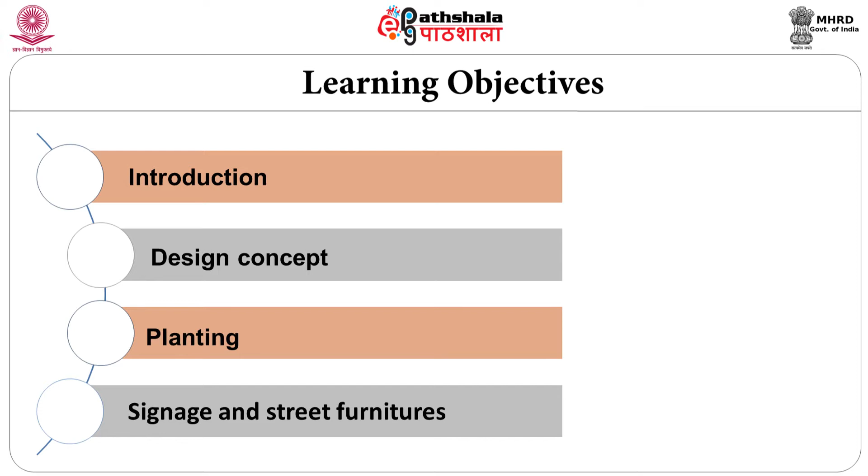Welcome to ePathshala. We are now going to talk about urban designing of Ripon building, which was a 100 years old Indo-Saracenic architectural style building, which houses the Corporation of Chennai.

They have called for a competition of restoration of the historical landscaping and restoration of building architecture, incorporating what was there 100 years back when the old building was designed and executed with the landscape inputs. It was a very challenging project for us, as giving back what was there 100 years back was the assignment given to us. We designed everything incorporating the existing design features which are there as a historical landscape or Indo-Saracenic architecture, neo-architectural style, neo-classical style.

So we took up in landscaping the Mughal architecture as a concept, as a style to be adopted, and then we adopted neo-classical style of architecture for all the buildings which are going to happen around the Ripon building.

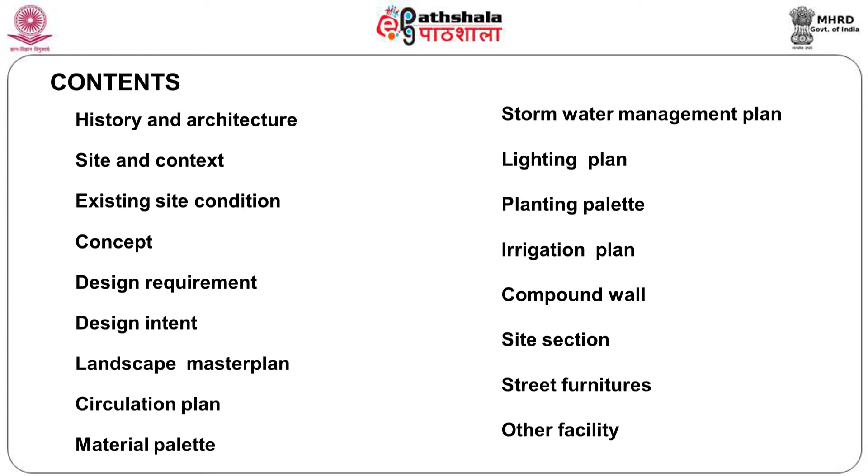Then cross-section of the building, street furniture - you need to have a drinking water facility, other facilities for people to sit, some benches and other facilities which are required for the building need to be taken care of. Ripon building is the seat of Chennai Corporation.

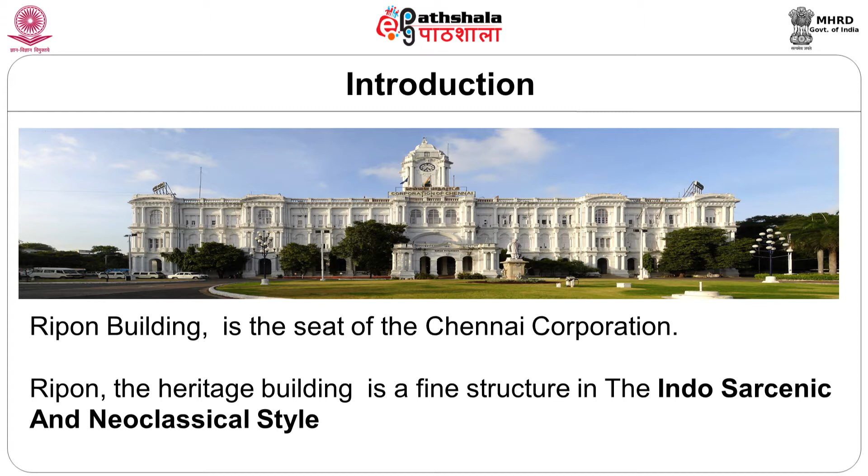Ripon, a heritage building, is a fine structure in Indo-Saracenic and neo-classical style. This building was commissioned in the year 1913 and derived its name from the father of local self-government and Governor General of India during British time, Lord Ripon.

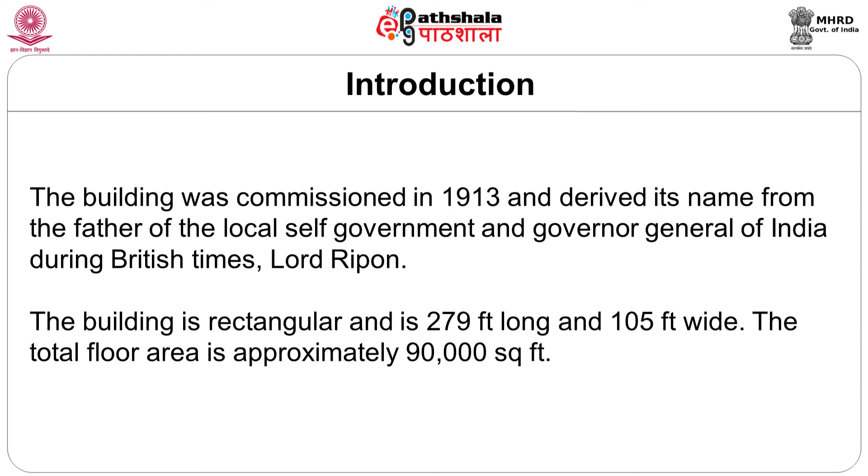The building is basically a rectangular building in those days, roughly 279 feet long and 105 feet wide. The total floor area is approximately 90,000 square feet, roughly around 2 acres of built up area.

In 2012, they have taken up major renovation initiated under the Jawaharlal Nehru National Urban Renewal Mission to preserve the building's original grandeur.

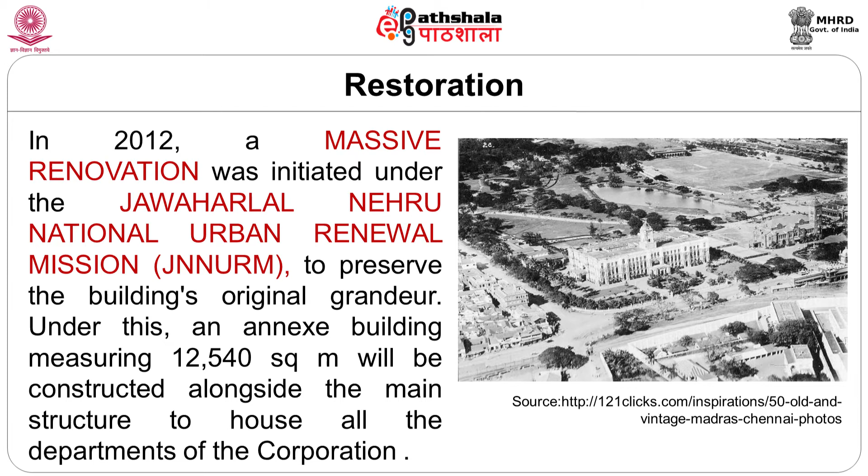And under this scheme, they also built another annexure building of 12,540 square meters that will take care of all the other building activity which are all there right now, which need to be demolished, as they do not blend with the architecture of the present situation. That was the basic intent of this particular assignment.

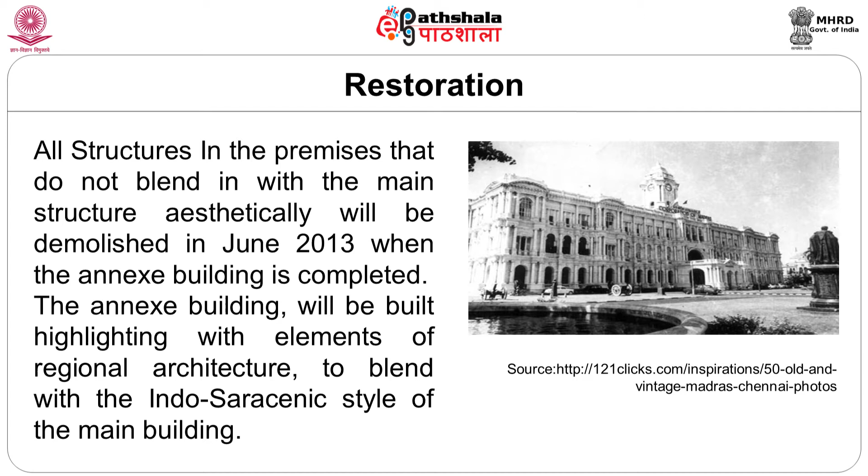So Ripon building is a fine structure in the Indo-Saracenic and Neoclassical style architecture. It's a smooth blend of Ionic, Gothic and Corinthian styles.

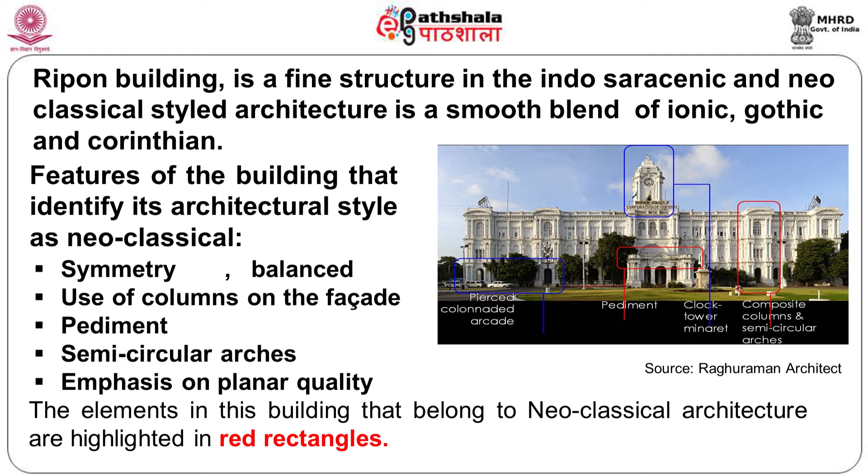The features of the building that identify its architectural style as Neoclassical are basically symmetry, balance, use of columns on the facade, pediments, semicircular arches, and emphasis on planar quality. The elements belonging to neoclassical architecture are highlighted in the rectangles shown, which are all neoclassical styles.

Features in the building that identify its architectural style as Indo-Saracenic. We are talking about two things: neoclassical and Indo-Saracenic. The Indo-Saracenic elements come under the clock tower, marked in blue, internal courtyards, and pierced colonnaded arcades. These all become part of the Indo-Saracenic style. It is a mixture of both styles, but it's a very elegant building.

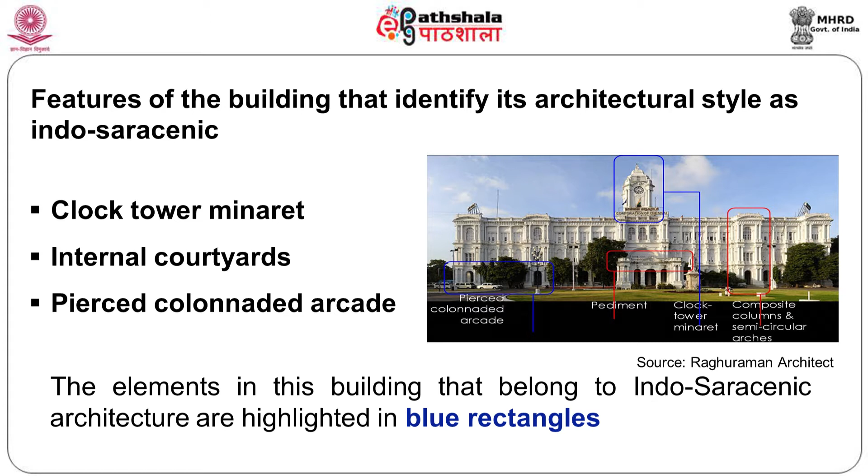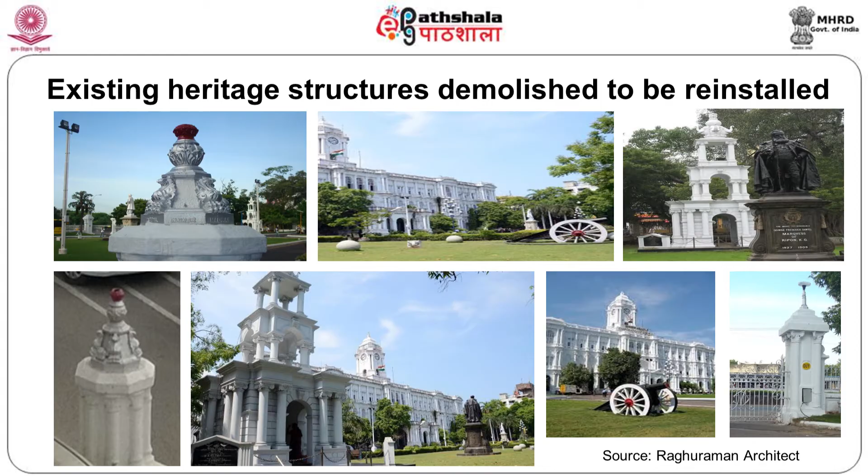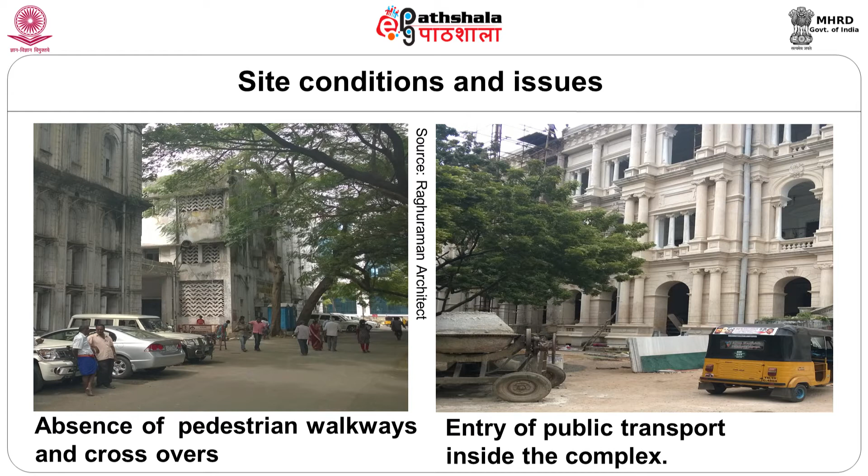Now cars are parked in a haphazard way everywhere, wherever space is available. Again, the trees have grown in a different shape as the sunlight angle changes because of the existing buildings. There are 4 statues of eminent personalities housed in this particular facade of the building, which need to be organized.

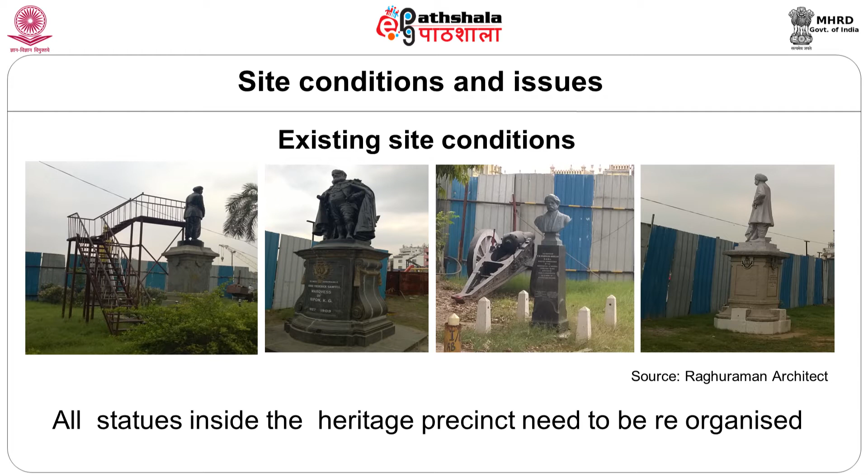It's a basic site plan. Now we are showing you the site plan view, but first we will see the site boundary. This is the boundary, roughly around 12 acres of area. The heart of the city corporation of Chennai is holding around 12 acres. It's itself a very big area, but we have to use it very effectively, which is more important.

We talked about the boundary line, then we have the roads - major roads like Poonamallee High Road, and internal access roads are available. We have a railway station, Central Chennai Railway Station next to that, and a Reservation Complex next to that. So all these very heritage roads - this is more of a heritage road. So how are we going to approach this?

Then we are talking about internal roads - these yellow colors are internal roads. Then we are talking about heritage buildings - the Ripon building and Victoria Hall, both are heritage buildings. Then these red color ones are all proposed buildings.

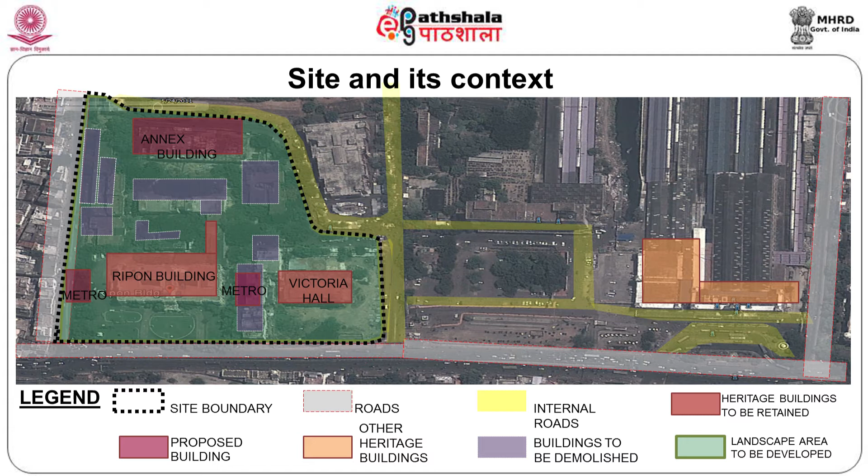Then this whole entire area needs to be landscaped. Then we look at the existing tree cover and greenery survey drawing.

Some design concept - we will talk about the design concept. We have 2-3 activities which are going to take place here. We are talking about building some structures in terms of connecting corridors, car parking, and then canteen or restaurants or eating places.

Then your landscaping is going to be in Mughal architectural style because it's squares and rectangles, which will give guidance from the building. You have to take the hint from the building - the building is more important than the landscaping. So landscaping has to be subdued, but Mughal architectural style landscaping needs to be done here.

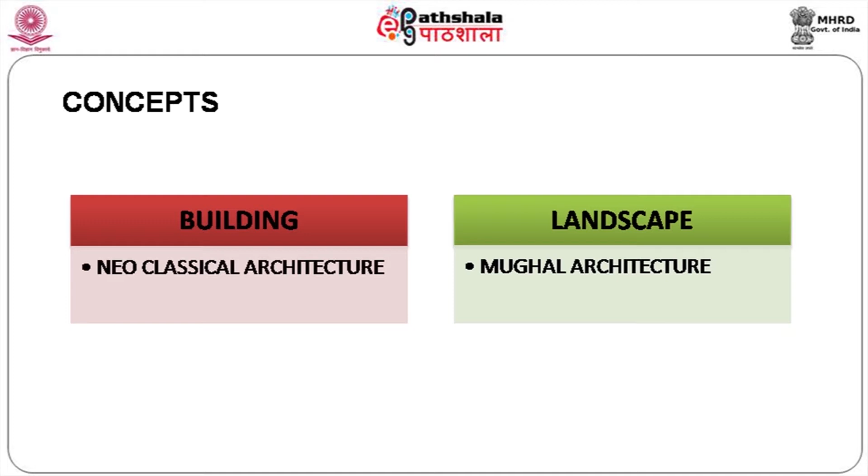What is the design requirement? The landscape design, circulation, multi-level and basement parking area is required. Then we are talking about stormwater drain network, rainwater harvesting is a must, and what kind of material we are using, planting plan. Then you need to have an irrigation network, electrical design, canteen, library and play courts. People also need to relax in that area.

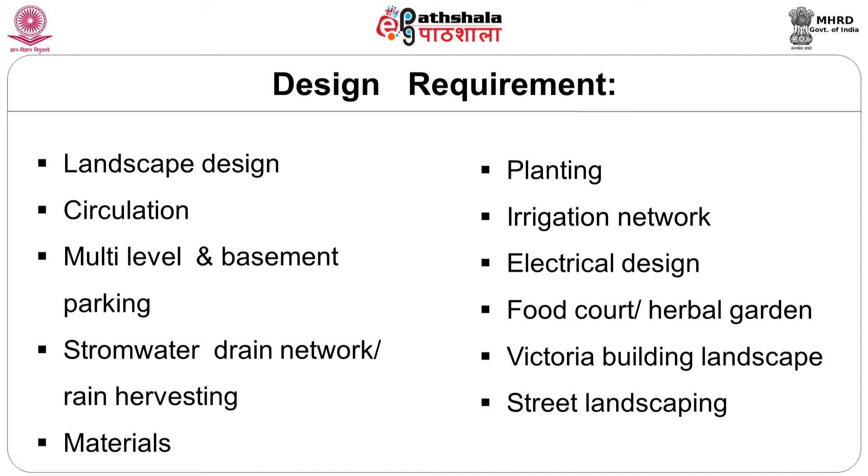Then you have an adjacent building, the Victoria building, where you need to do the landscaping. Then your street landscaping, which is more important. All these things will contribute to the overall design requirement.

Design intent - basically what are we going to do? Circulation: entry strategically located considering the metro and bus terminals, with separate entry for VIP, staff and visitors for security reasons. So staff and VIP entrance need to be segregated so that everybody cannot enter through every access available. Then only you will have overall control of people entering the building area.

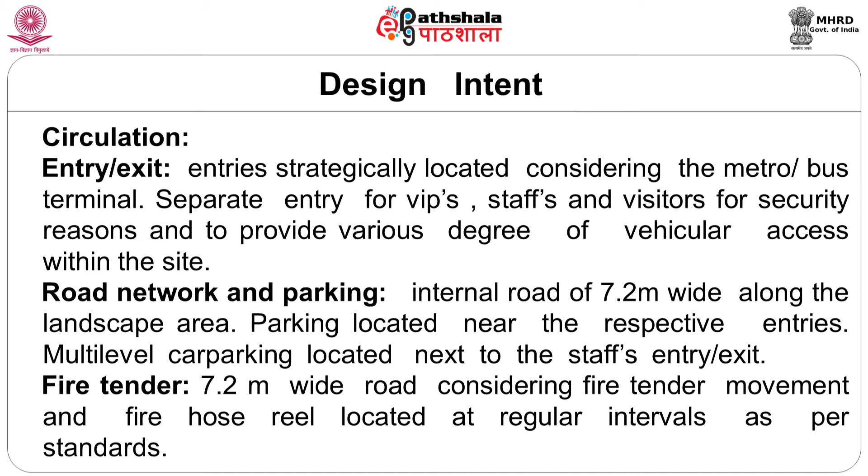The width of the road is also equally important - we need fire tenders to move around. Then we have to have a proper clockwise circulation so that people can enter from one direction and go in the other direction, or move around in a different way.

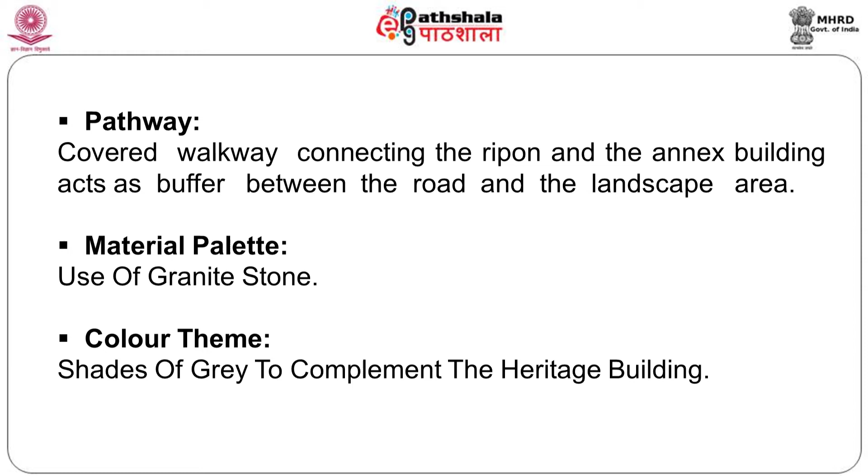Then you need to have connecting pathways which also have to be covered so that rain or shine it can work properly. For material, whatever natural material we plan to use - use of granite stones. Color theme: shades of grey to complement the heritage building. And rainwater harvesting - rainwater harvesting pits and ponds are proposed to harvest all the rainwater generated within the site.

Planting - how to go about tree planting and shrub planting.

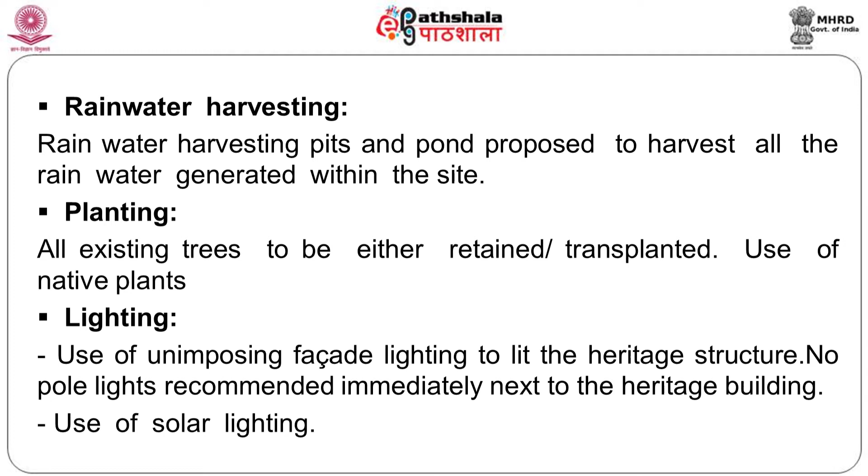All existing trees are to be either retained or transplanted, and we will use native plants. For lighting, we recommend unimposing facade lighting to light the heritage structure.

Old demolished structures need to be re-erected. Signages and street furniture also play an important role—you need benches for seating, a drinking water fountain, and signages to different places. You should not get lost in the campus; that is more important.

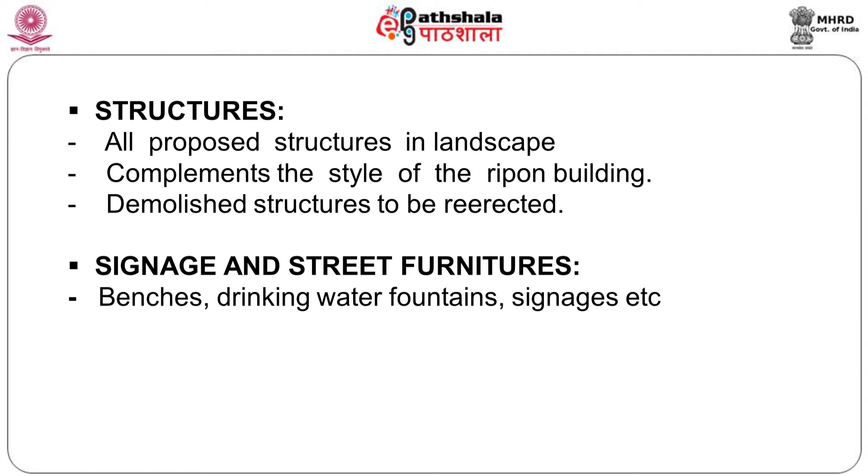The kolam and similar features are provided mainly as a showcase for the public to view that we are doing rain harvesting. Apart from rain harvesting holes provided all over the site, the excess water will collect in the kolam, and from there it can go into the normal rainwater drainages along the streets. That is more important. Plus the car parking and courtyards will all contribute to the restoration of this campus, to bring back its glory.

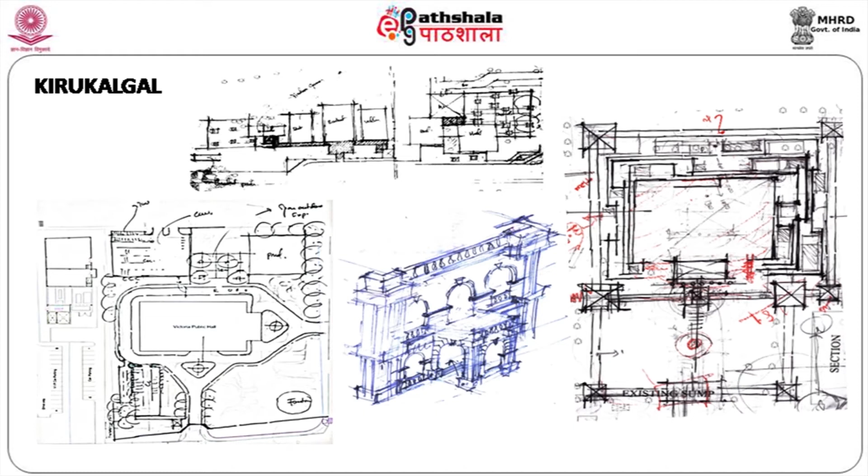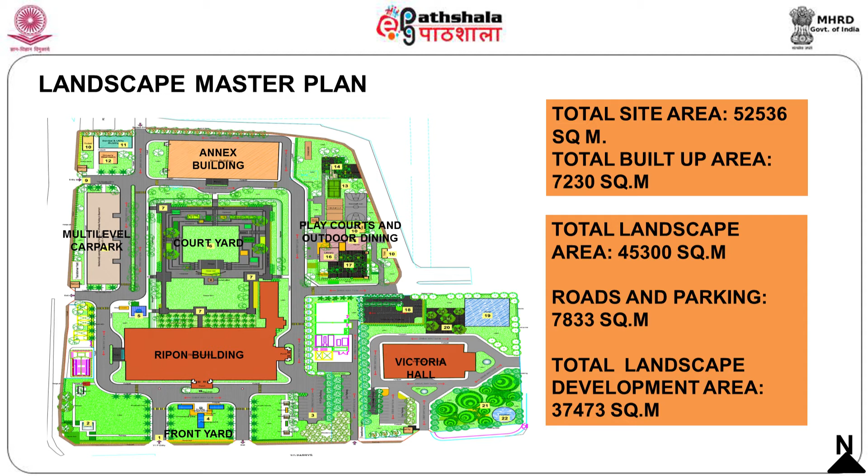So basically we have given requirements for VIP car parking, visitors car parking, visitors two-wheeler parking, staff parking, and basement two-wheeler parking—a lot of different types of parking have been provided. Apart from that, if you look at the length of the road, it's quite big, so there's enough parking to take care of all requirements.

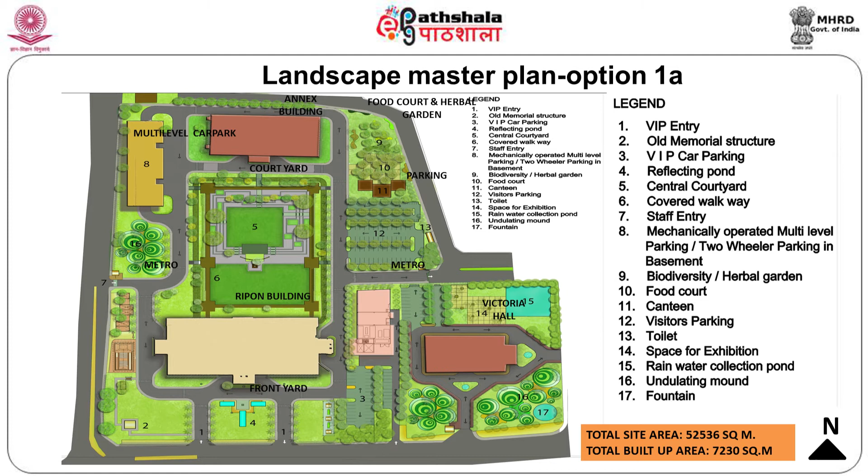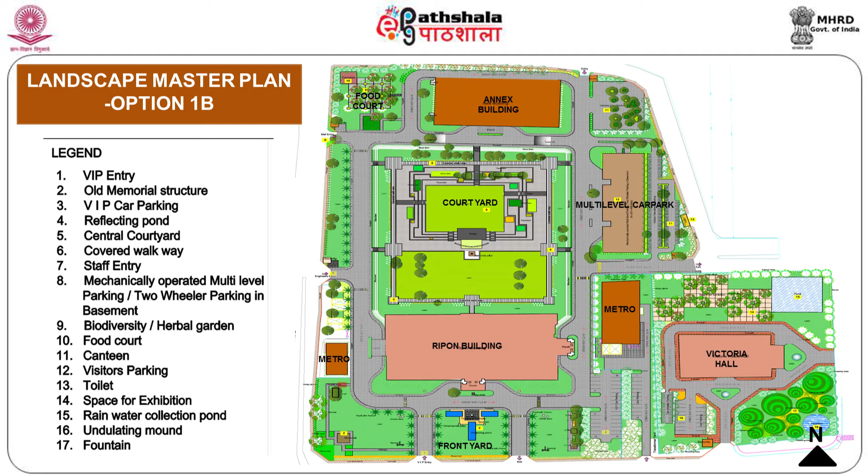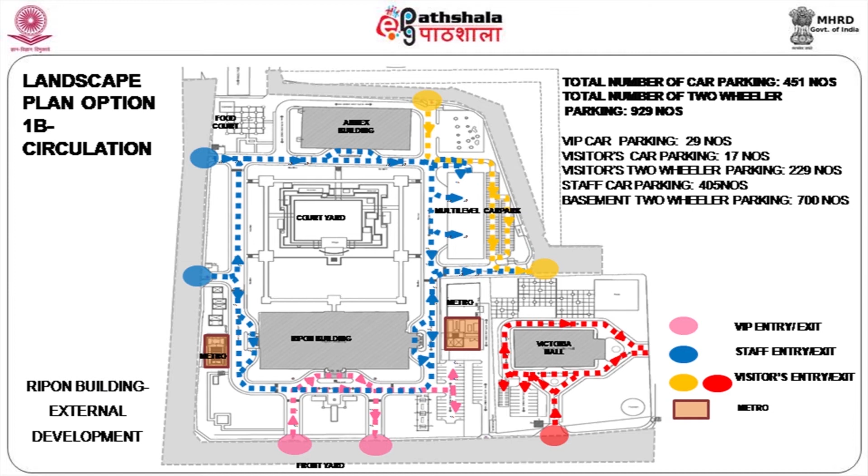Next to this we have Victoria Hall, which also needs extensive landscaping. This will become an exhibition center once the entire campus is developed. Now you can see the overall planning—multi-level parking provided on the northwest side, but ultimately it is going to be mostly on the northeast side. These are all different options provided by us.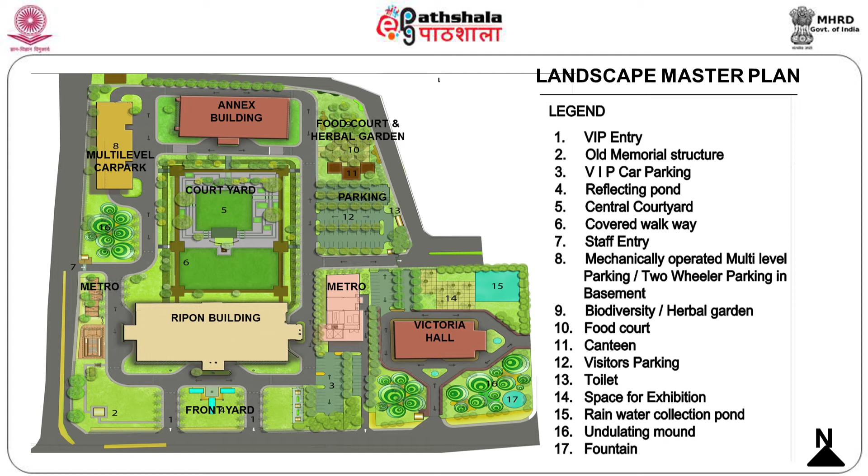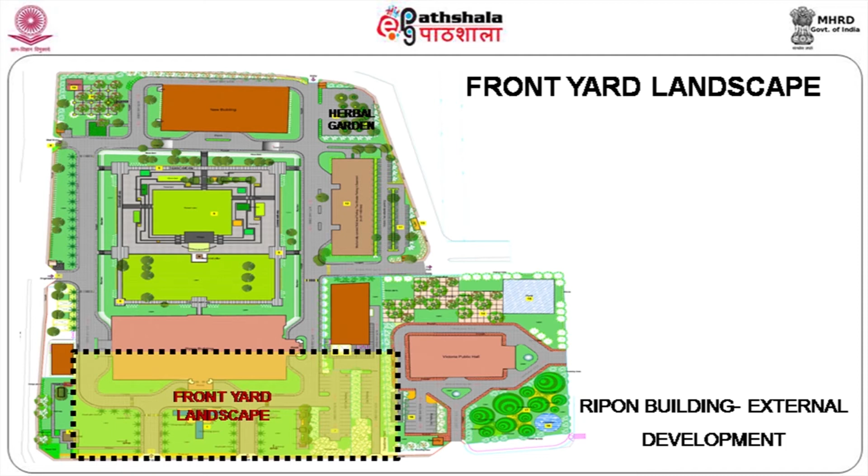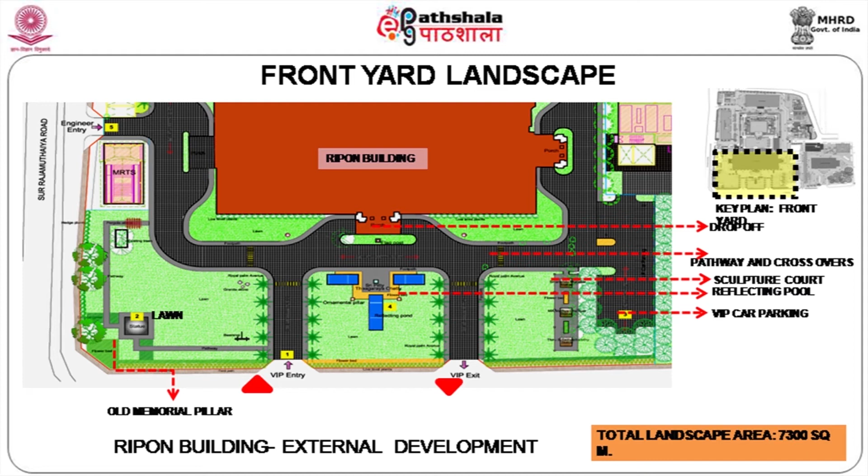So we are talking about front area landscaping now. What is going to come up in the front area? It's more important—you have a flag post, a reflection pond, and a structure that was there when the building was constructed but has been removed because of the metro rail. All those things need to come up.

We also wish to organize the statues so they need not be haphazardly placed. Whenever people go to respect a person with garlanding a statue, there should be a line-up where people can stand and do the honoring.

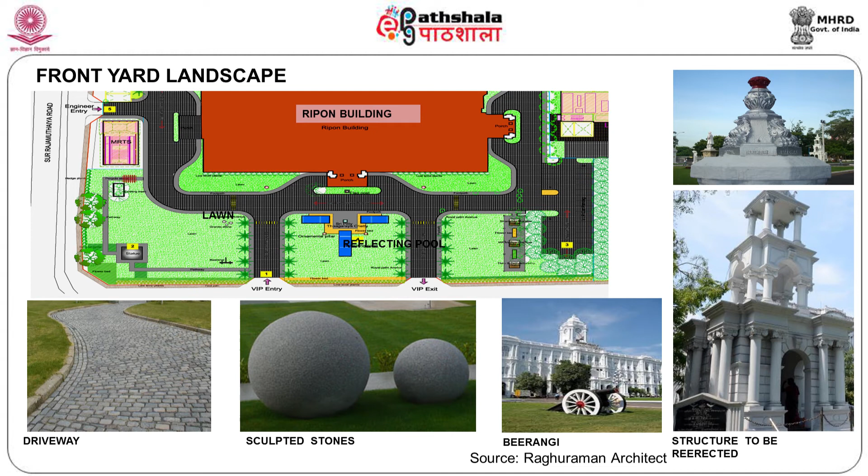Then you have a large reflection pond of the building, and other different elements—what you see on the right is firefighting equipment, and this particular structure was there in those days as a monumental structure to be recreated. Then you have a cannon, concrete balls, and a pattern for the driveway. All these things are required to restore the building to its own glory.

Very importantly, while doing landscaping or urban design in this campus, our objective is mainly to give importance to the building, not to the landscaping. Landscaping has to be very subdued, very minimal—it's an open landscaping because people have to see from the road that this building has been landscaped well.

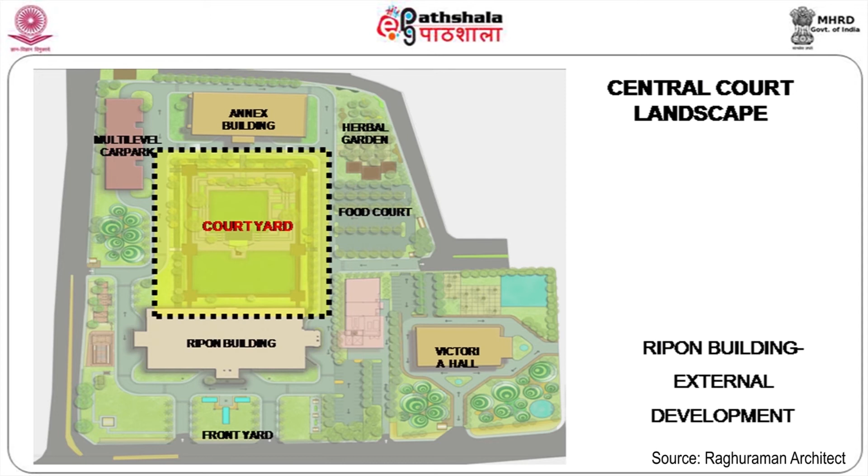People need to walk from this building to that building daily, many times, so you need a good covered walkway. Then this central open space can become a lawn that can host up to 20,000 people—a very huge area with seating facility available. Then you are going to have a memorial pillar to mark the centenary celebration of the Ripon building.

So all those things will have a lot of impact on the landscaping development.

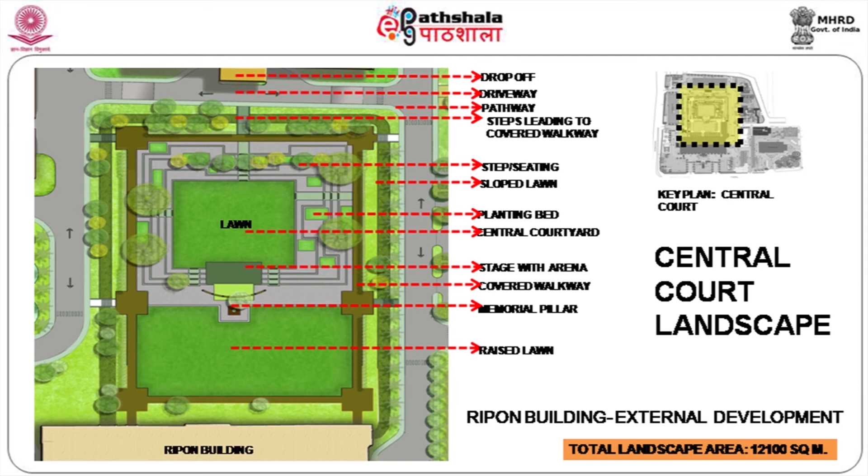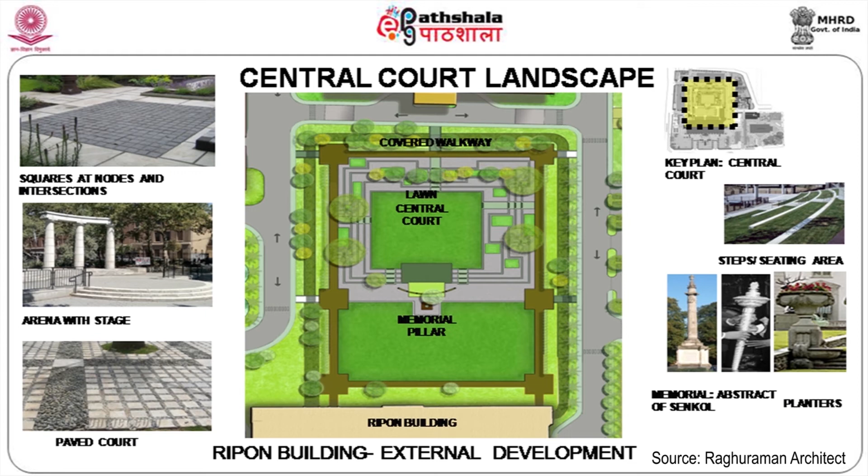So you can see some of the views, some of the pavement which are being used by us for developing this particular building. Now you can see how this whole thing is being developed with different materials, different seating arrangements, grass being laid out, people walking, and central trees being provided. There is enough space for the corporation to have a small hoarding space where they can display their developments and programs along the wall.

This being the central open space, how does it look? The overall picture, how the connecting corridors will take place, how the lawn area is there, how a stage has been provided.

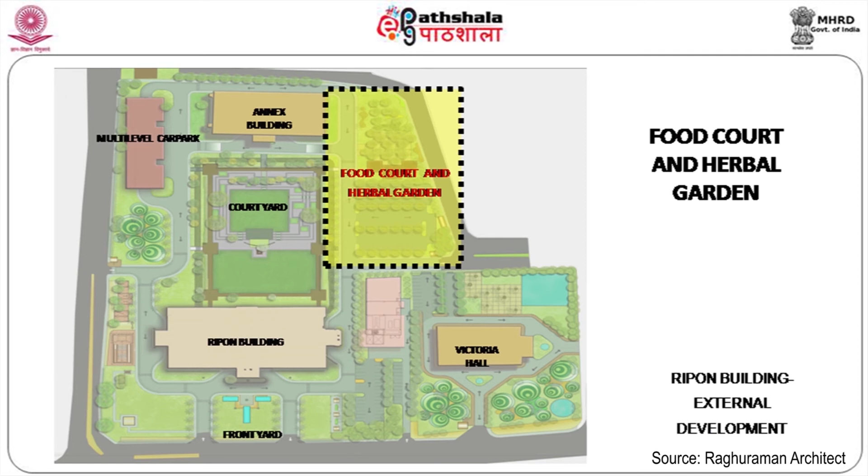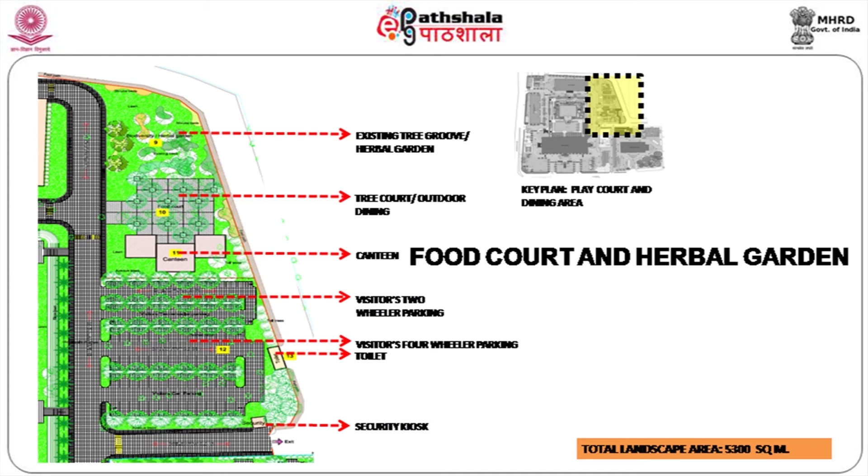Then we are talking about the food court and herbal garden provided on the northeast corner. People need to eat during lunchtime, and they have an excellent canteen where most of the food is prepared in an organic way. Existing tree groves can be converted into a herbal garden with a tree court and seating for outdoor dining. You have a nice canteen with parking facility.

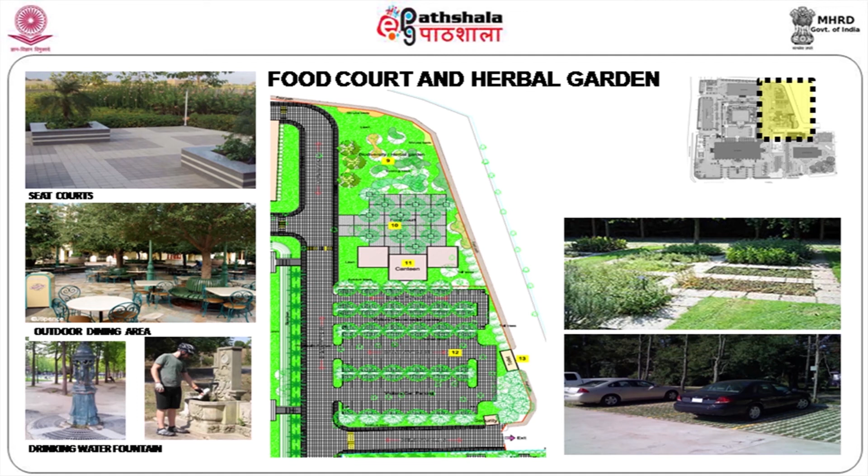More so, we need to provide a drinking water facility all around the campus. There's a tree court at the entry point to the canteen building, designed to reflect the Indo-Saracenic architectural style. So you can see everything comes up in the same style, with the flooring, footpath, flower beds, squares and rectangles. The Mughal architectural style has been followed here.

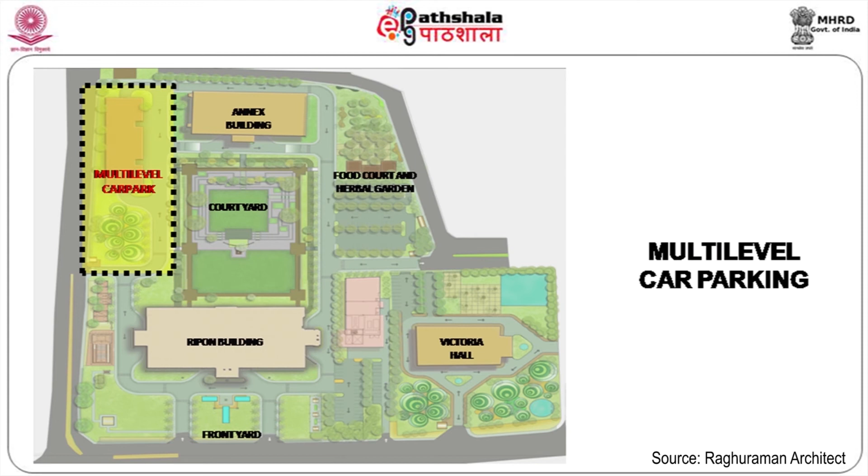And we are thinking in terms of multi-level car parking. We have to accommodate something around 500 cars and some 700 two-wheelers. How are we going to accommodate that? That design has been taken care of - multi-level car parking.

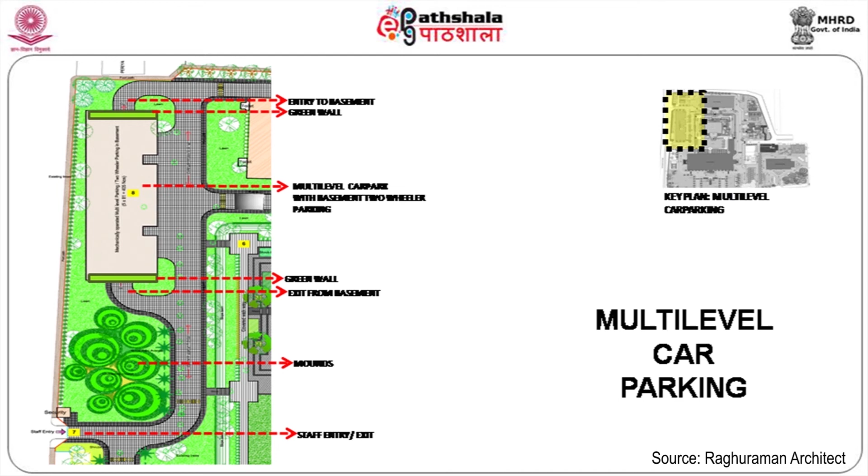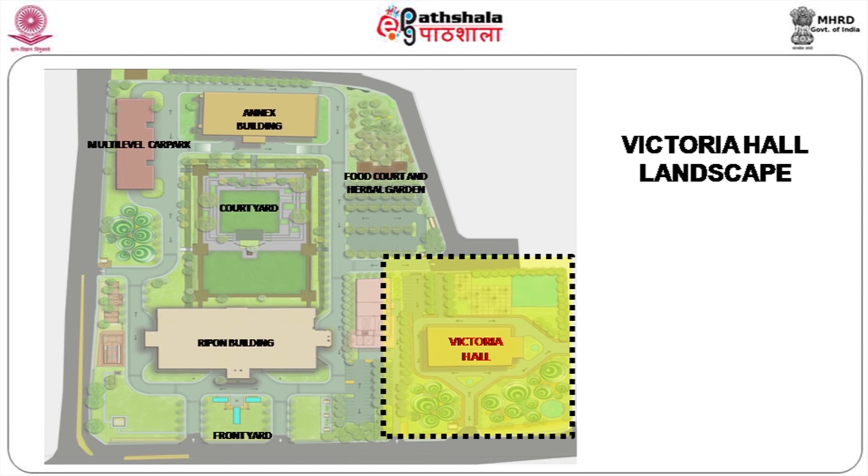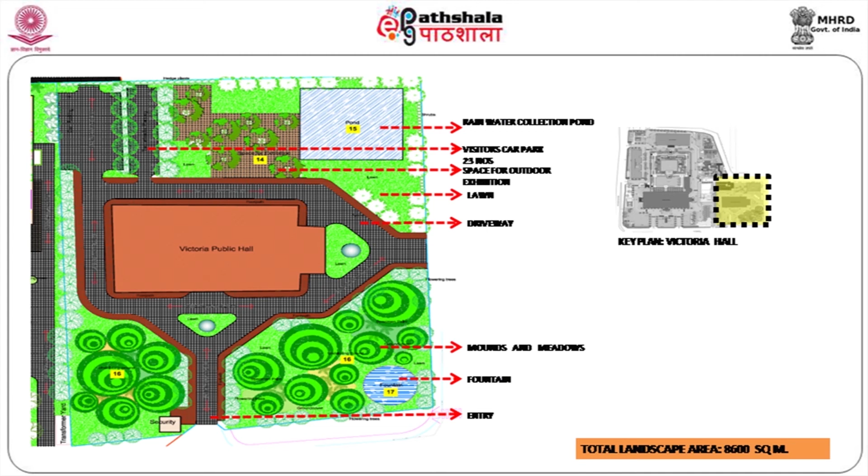Then we are talking about Victoria Hall landscaping. The hall needs to be landscaped, and we need proper circulation first. You need an ambience of space with an undulating lawn and a water body, then the entry and exit points with proper car and two-wheeler parking, plus a tree court for people to sit and enjoy. And you have a kulam or pond where people can sit and watch the water, like Padithurai and other things.

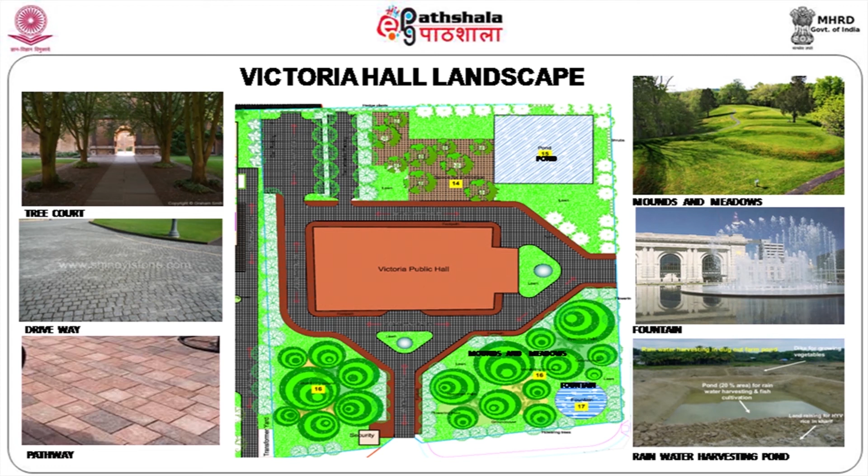These are all the fountains and paving patterns used at Victoria Public Hall. This is how it looks when everything is finished.

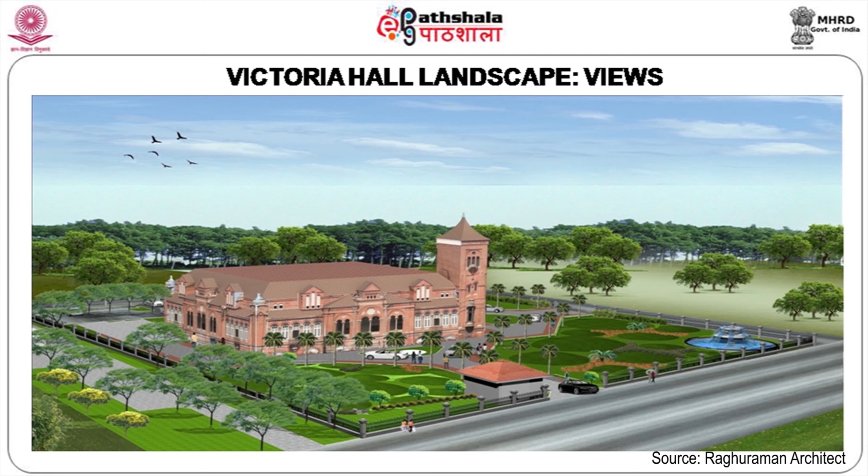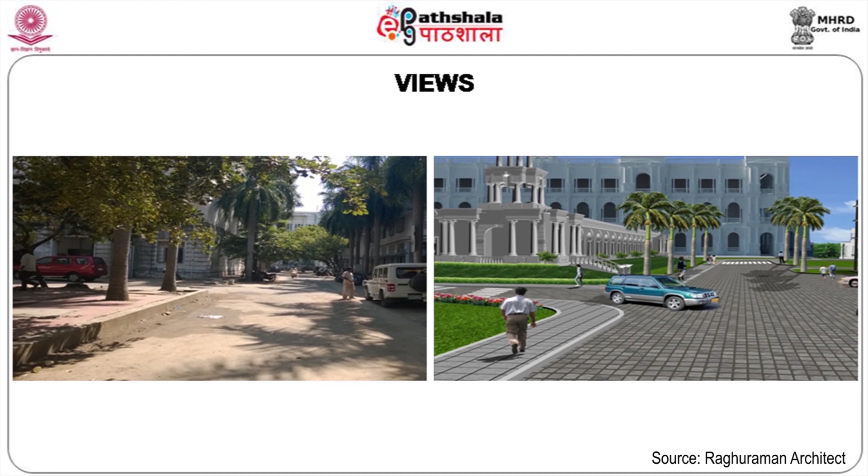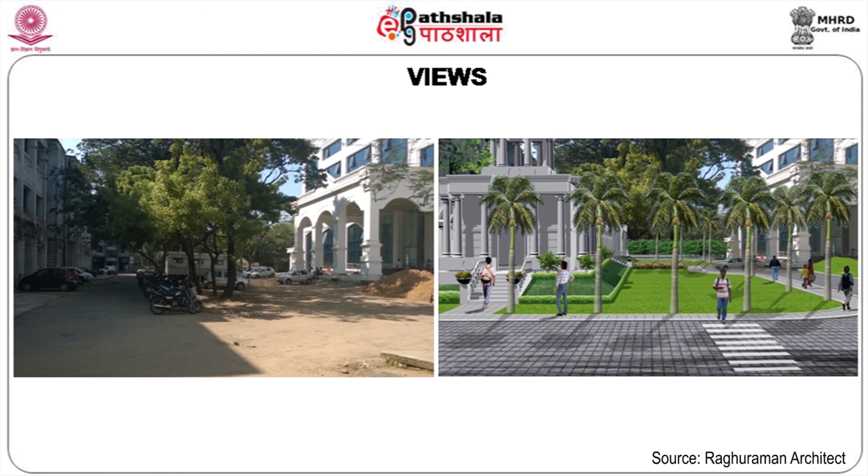And what are we going to do? What are you seeing at the present day, and how it will look in future with the same environment? So the same thing will look like this in the days to come. This building will be razed and then you have the corridor, the connecting corridor, coming up.

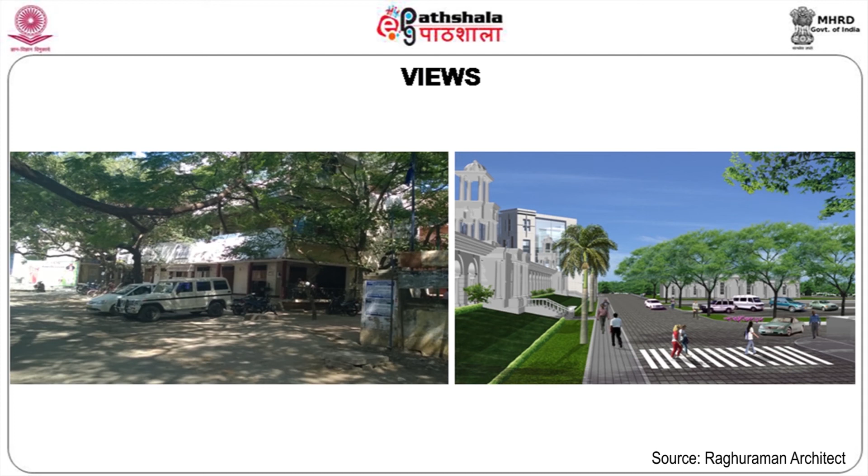Again, the existing canteen building needs to be razed and a new facility is being created there. Then we are talking about a material palette - what are the different types of materials used?

Basically, we are looking at a grey color combination. Somewhere we try to use some brown color so that some contrast is given.

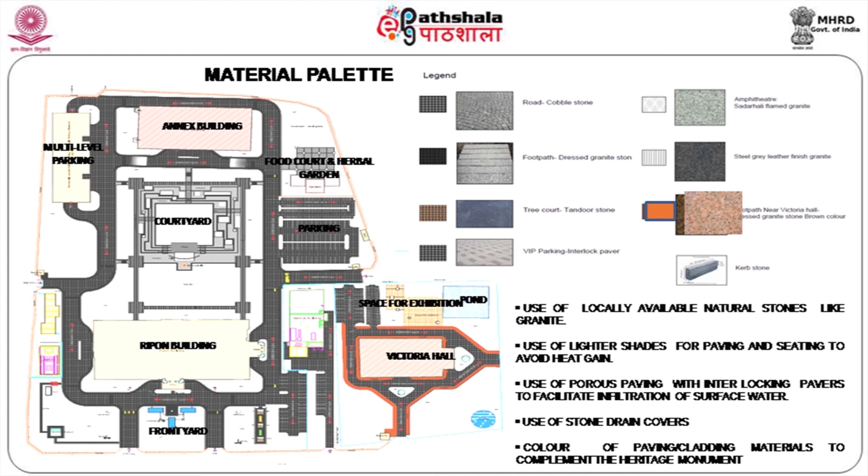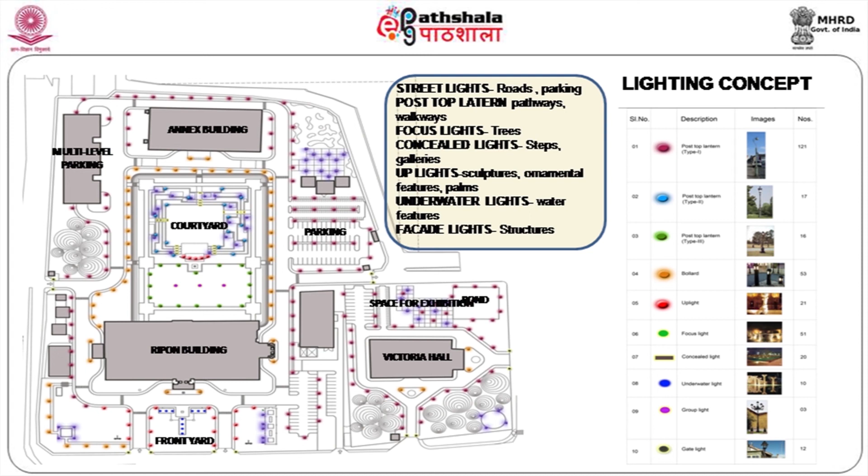Your lighting - what type of lighting you are using, uplighting for the building, some small posts or anything, will be provided. These things will take care of most of the lighting, with different types of light fixtures in different locations.

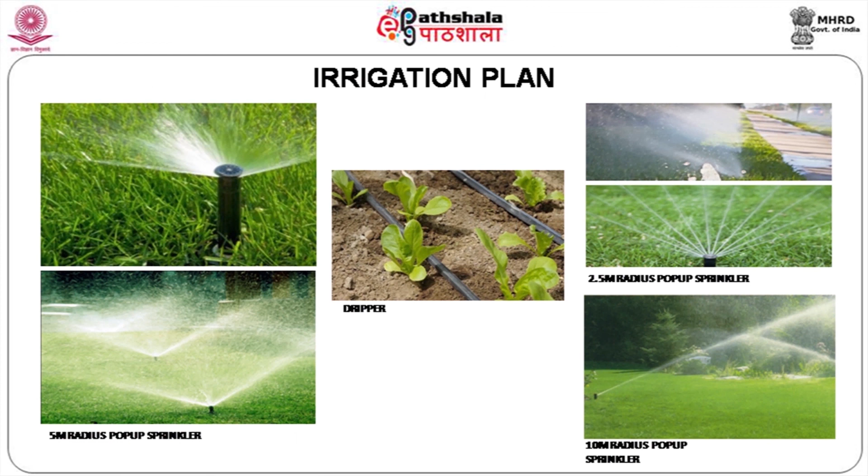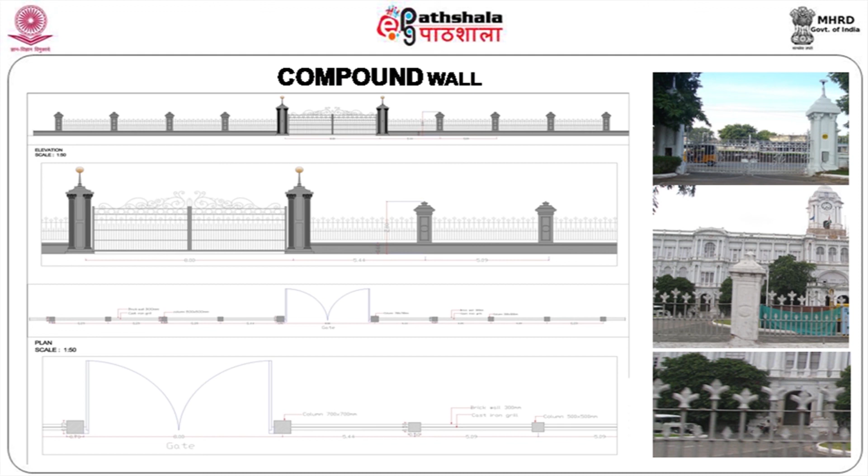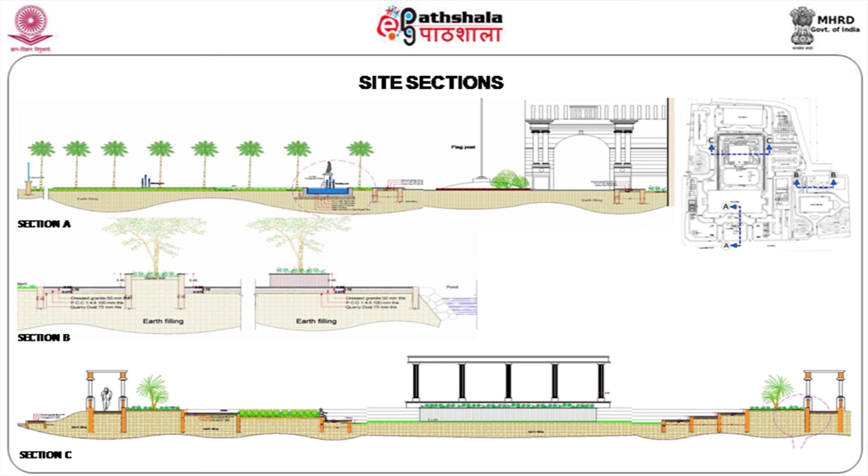Compound wall detail - how it was there 100 years back, and we are trying to reproduce the same thing. How the different levels are happening - we are going to dig up a huge double basement level under the car parking. The entire soil needs to be used, so that soil will be used for filling up the courtyard area.

And planting - different types of plants are used, shrubs and trees and palms and things like that. Hedge planting, planting palettes - the entire planting plan with trees, palms and things like that are planted. Then shrubs.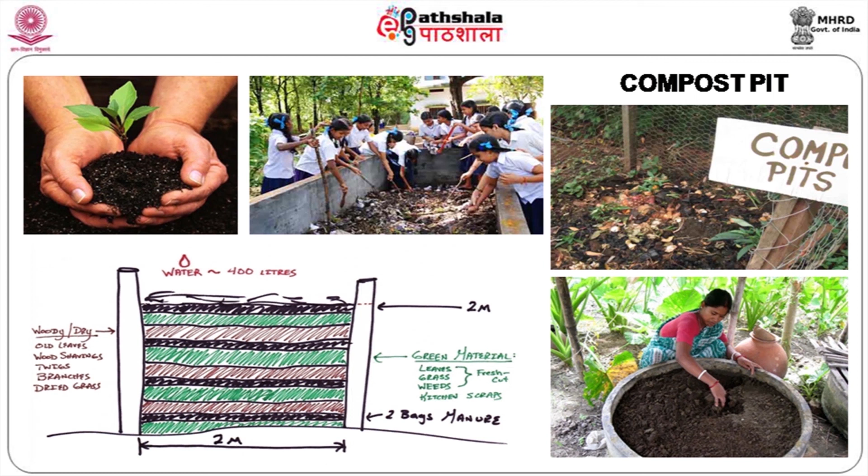We can take a herbal garden. Topiary. Then we need to have compost pits for solid waste management.

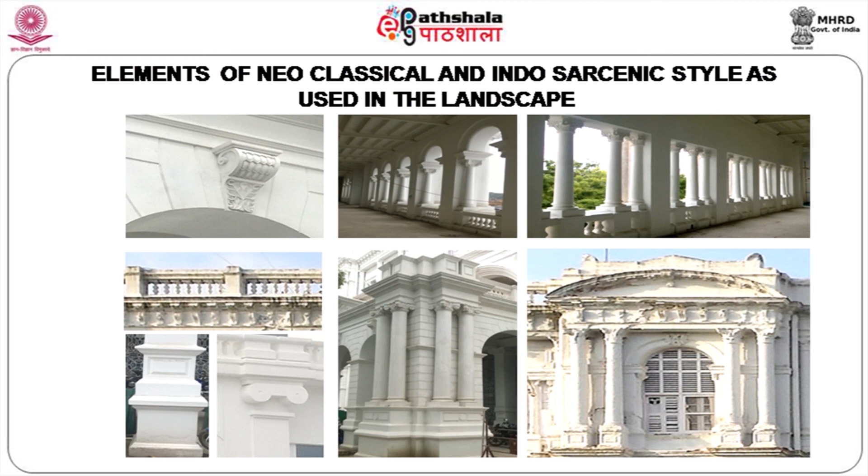And most of the architectural elements that are there in the building, what are we going to use them for in the building, which is more important. Then we are talking about signages and street furniture, different signages for different places, so people can go around the campus.

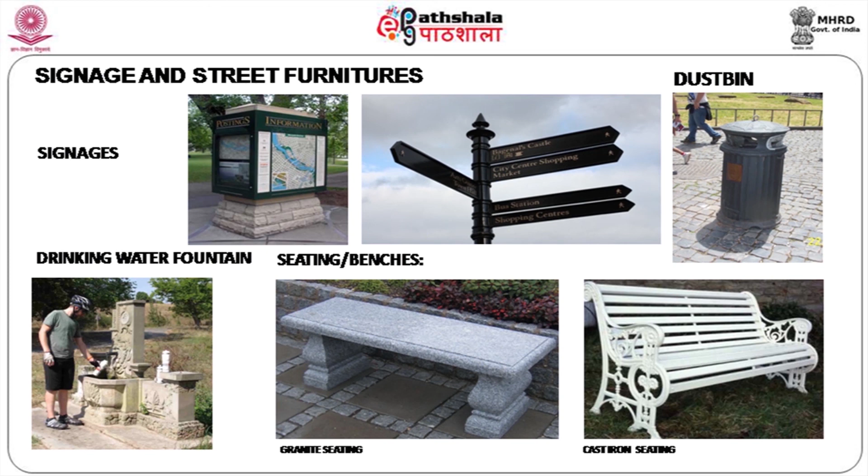As you have seen the entire proposal, we are also planning to have a proper drainage facility, rain harvesting, and all those natural conservation measures taken up across the overall site. You will see that this particular building, once the landscaping happens, will be a showcase for the public to see, and it will also be a milestone for the Corporation of Chennai to show the public that they can do a wonderful job. Thank you.